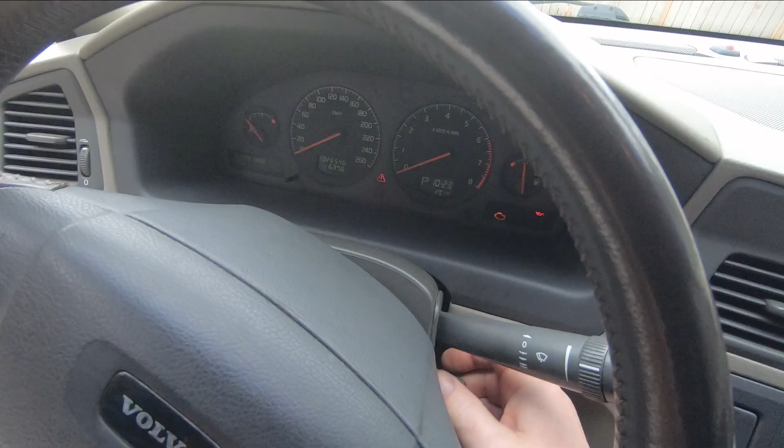See that? Kicks. Hear the fuel pump running. And it doesn't want to go. See that? And it will start eventually, but I don't want to force it, but it'll take quite a few times to get it to go.

Okay, so the other thing you might want to know about is just a little code reader. You can get these anywhere. They're about $20, $25, and you can read whatever code has been set, like when your check engine light comes on the dash of your car. You can plug this into what they call the OBD2 port, the onboard diagnostic port. It's usually down here under the dash, and then just turn your key to the on position, and this will come on, and then you'll get to a point where you can read the code, and it'll tell you what it is, and then you can erase the code.

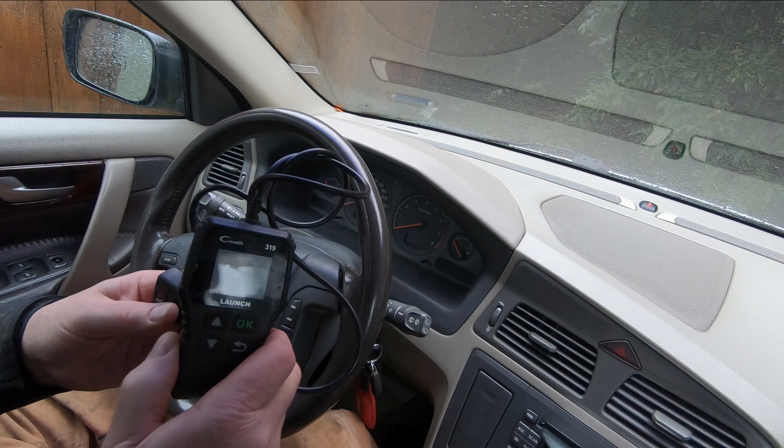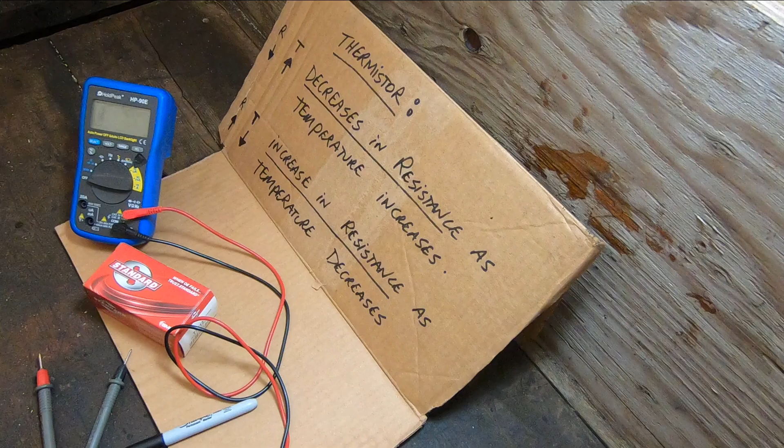Okay, a temperature sender is a thermistor. A thermistor decreases in resistance through it as the temperature increases, and it also does the opposite. It increases in resistance as the temperature decreases. So when the resistance goes down, as the temperature increases, the resistance climbs as the temperature decreases.

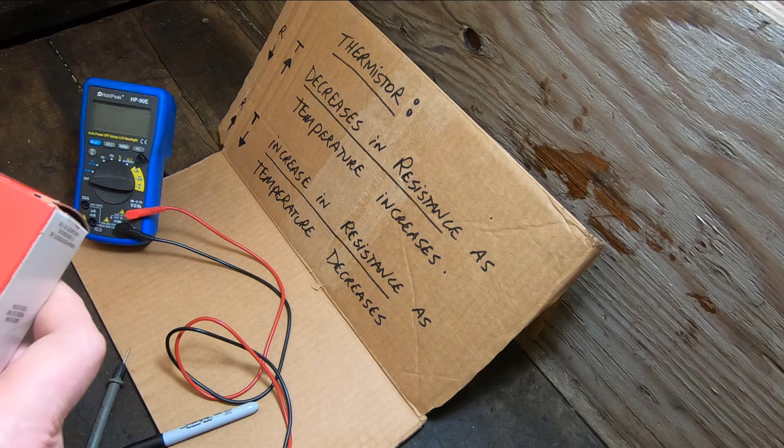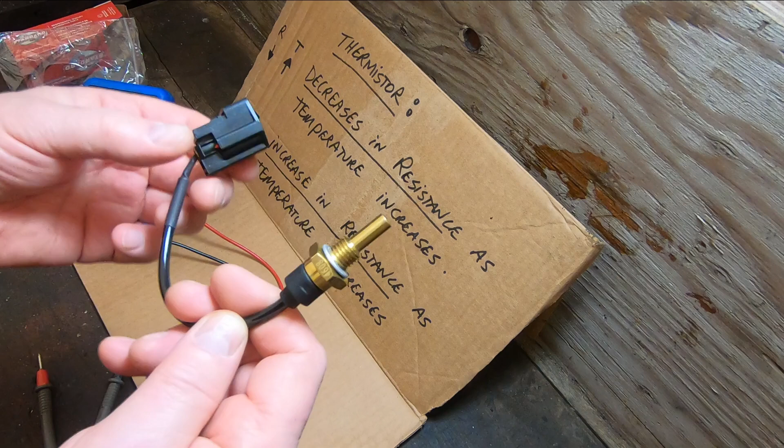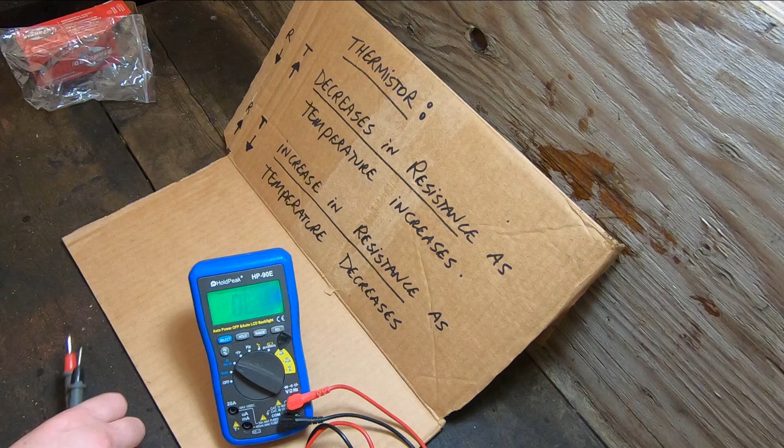And I can show you that here. Here's a new one. Okay, a probe. There's a thermistor inside of here, and it's got two connections out here. So we're just going to go on the resistance setting, the ohm setting on here. And this is just out in the air. So we're going to see if we can get a reading across here.

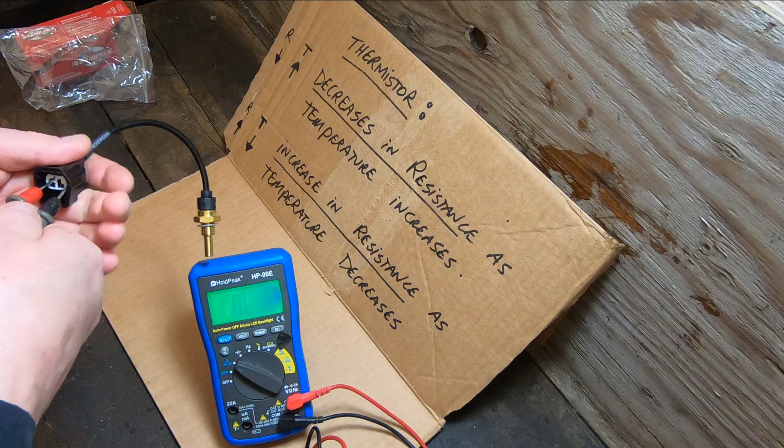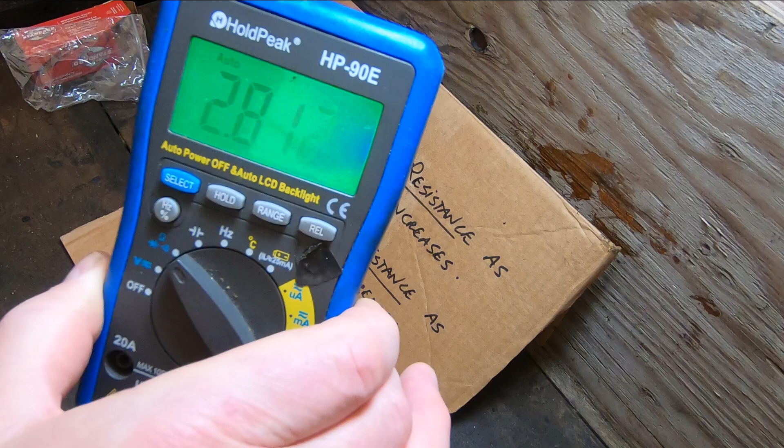Let's see here. Okay, so with this just hanging in free air, we're getting 2.82 thousand ohms. So 2.82 kilo ohms. Okay, 2.83. So it's going to level out there somewhere.

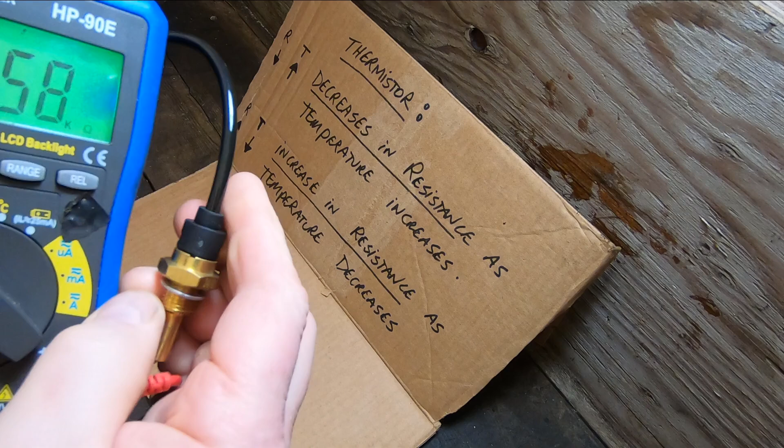All right, now watch what happens when I hold that probe in my hand. Let's warm that up. See it falling? So all I'm doing is I'm warming up that probe, and the resistance is decreasing as the temperature increases. Okay, and that's how they work.

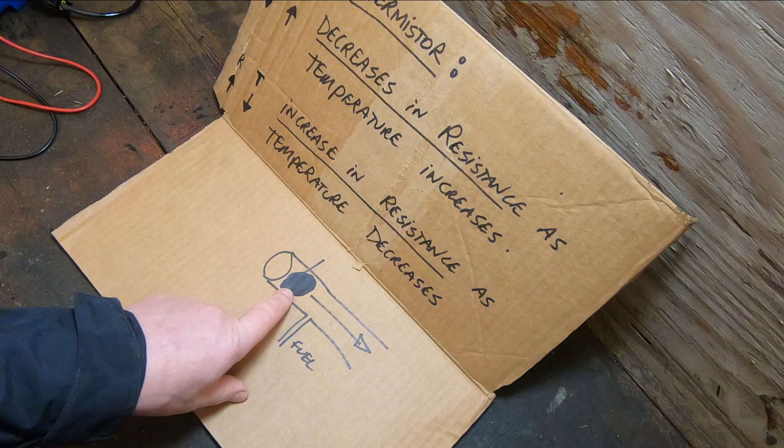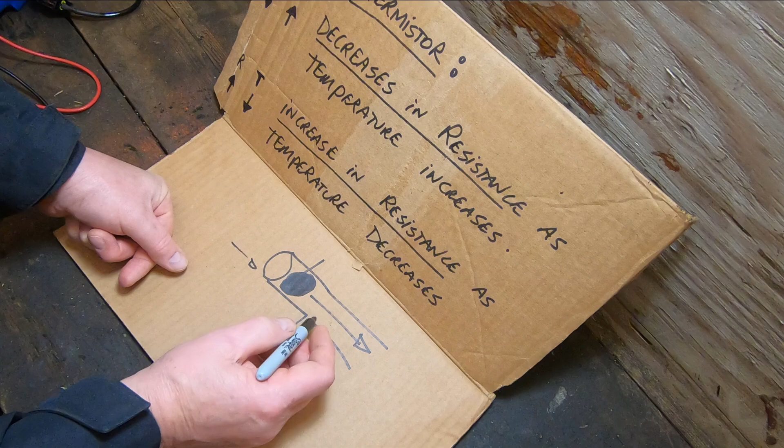Okay, so on a small engine, everyone's familiar with a manual choke. So what we do when the engine's cold, we close the choke, and what it does is it reduces the amount of air that's allowed in here, and that increases the amount of fuel that's going to be introduced to the engine on a cold start. So that helps with the start. With a cold start, you get more fuel and less air. So you get more fuel going into the engine on a cold start when the choke is closed, and once the engine warms up a little bit and you open the choke, then you get less fuel going in. And so the engine runs more efficiently, but you're not really worried about efficiency when you want it started.

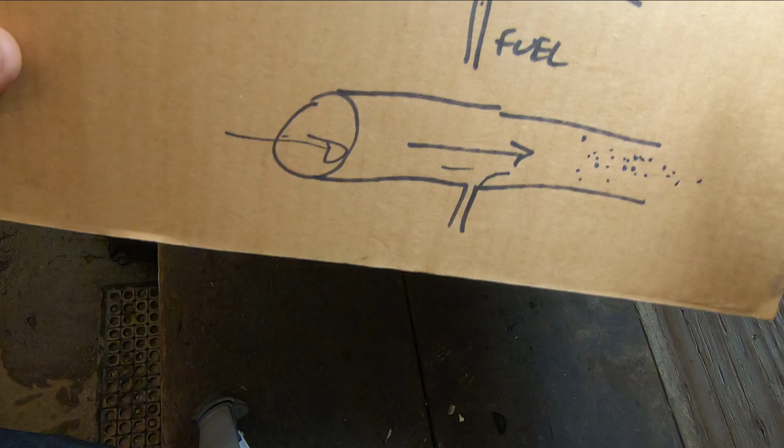You want to start it quickly and you want it to run smooth when it's cold, so you run it quite rich. Basically the electronics on a modern car operate the same as a choke. Even though there's no choke butterfly in the intake stream, it does this another way.

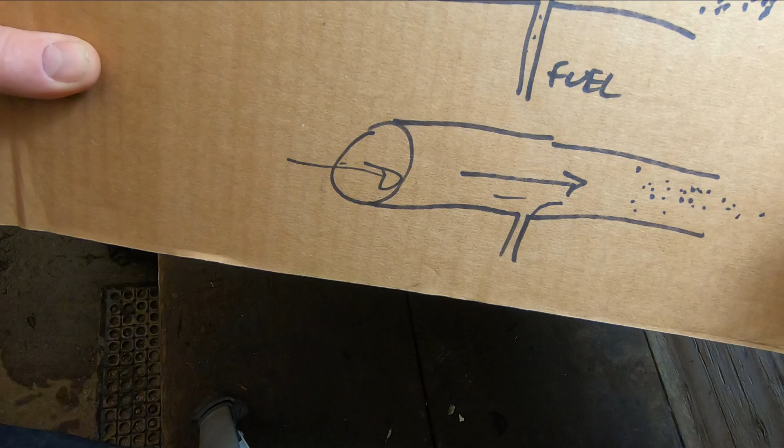It's critical that all the sensors on the engine work in harmony with each other, and if any one of them's out of whack, it'll disturb how the engine runs. It may not even run at all sometimes, but I'll walk you through on this very brief sketch here.

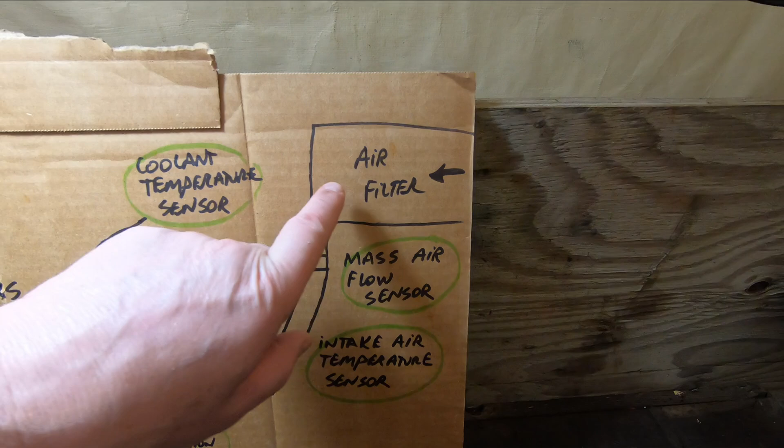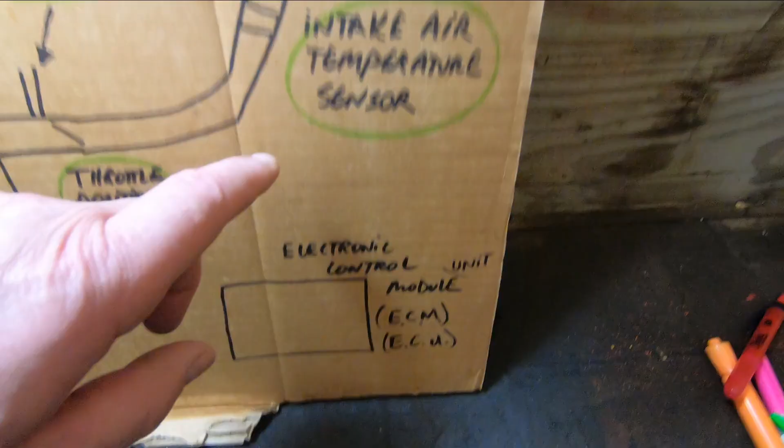Just take a look at this very oversimplified drawing of an engine and the sensors. Let's start at the air intake. You get your air filter, and the air coming in passes through a mass airflow sensor. That lets the electronic control module, or the electronic control unit, the computer, know exactly how much air is coming into the engine through the pipe on the way into the engine.

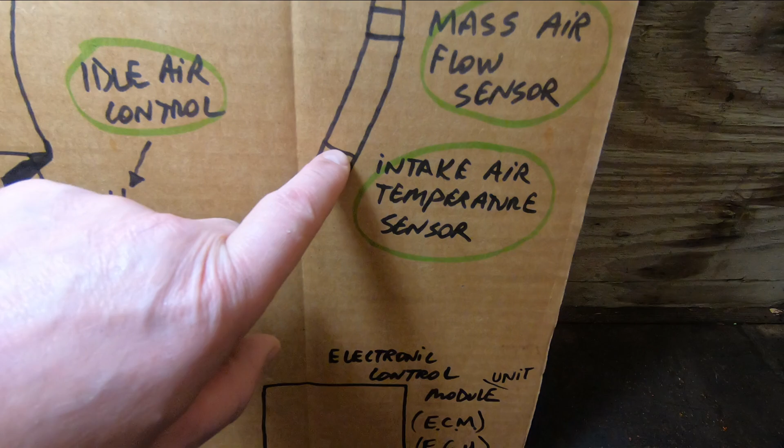There's another sensor called the intake air temperature sensor, and that's self-explanatory. It wants to know what temperature the air is so it can compensate with the amount of fuel that it injects. Over here at the injectors, there's the coolant temperature sensor, what we're looking at today.

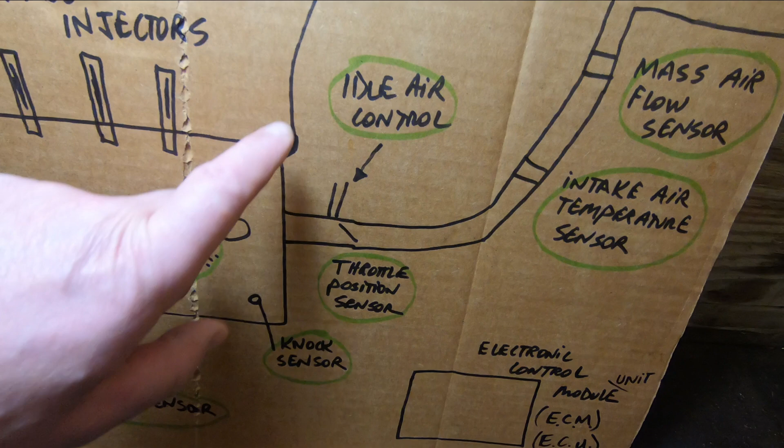You have an idle air control solenoid. It's not really a sensor, but it works in conjunction with the throttle position sensor to allow more or less air into the system, especially at idle.

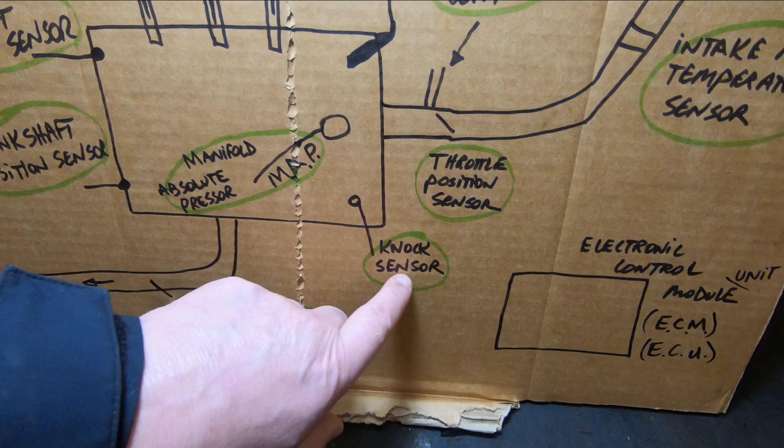Then you have knock sensors. If the engine's knocking and vibrating in a certain way when it's starting to run or when it's running, that could be from pre-detonation of the fuel and things like that. That'll send a signal back to adjust the fuel air mixture and usually light up the trouble light on the dash. You have the manifold absolute pressure sensor that detects either pressure or vacuum in the intake manifold, and that all goes into the computer again to help determine the fuel air mixture.

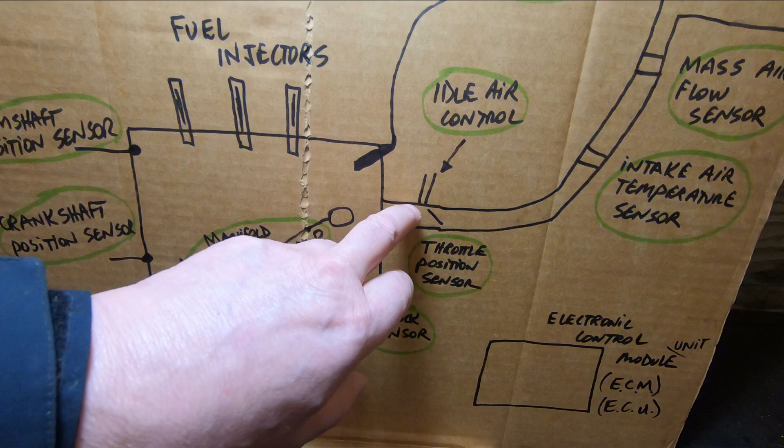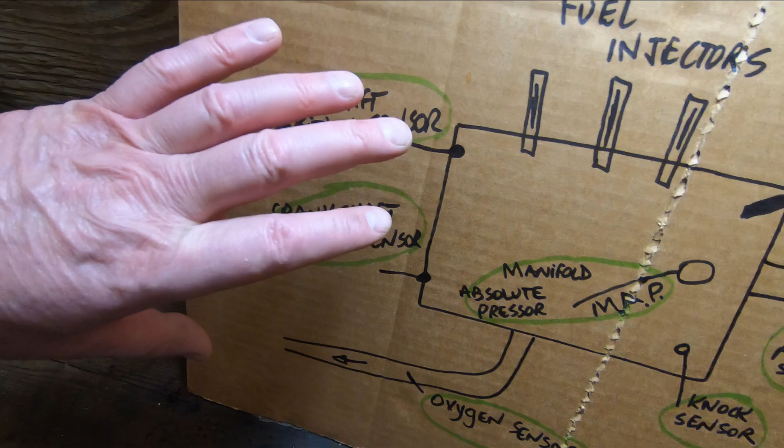You have an oxygen sensor in the outlet pipe. You'll usually have one before and after the catalytic converter, and this lets the computer know how efficiently the fuel combustion is in the engine. You'll also have a camshaft position sensor and a crankshaft position sensor, which let the computer know if the engine's in the right spot for the fuel injection to occur to explode the fuel.

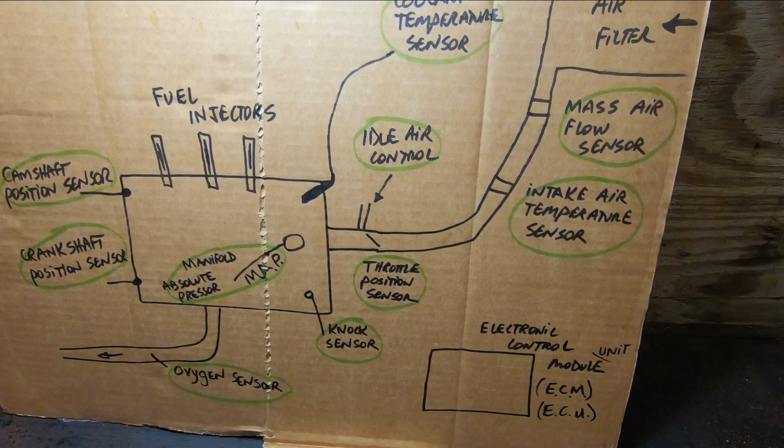That's an overview of the sensors. Now, if any one of those is out of whack, or if it's not reading correctly, it'll send a trouble code, and that's what we've got in this case. We've got a trouble code, and I'll tell you what that is - I'll put that on the screen here in a second. I checked it, and it came up as coolant temperature sensor.

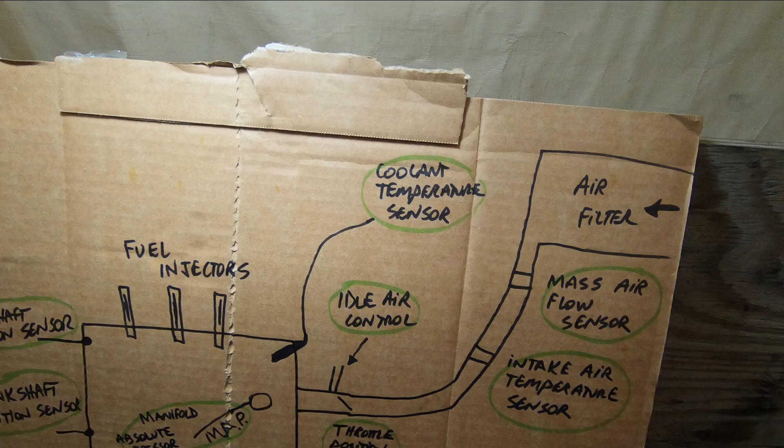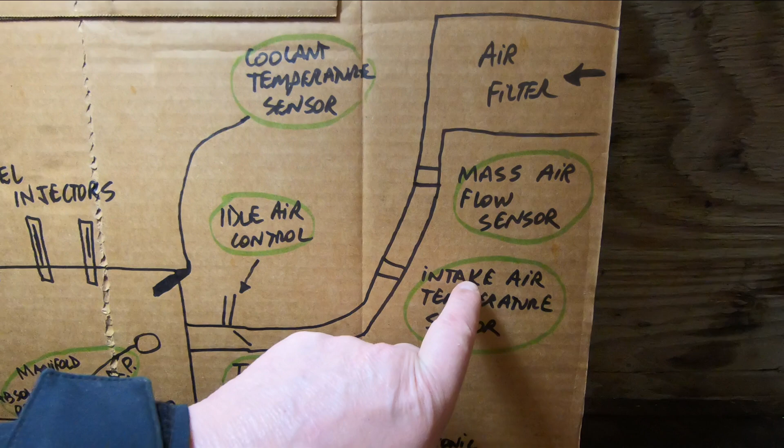Now, most people would say the coolant temperature sensor is just going to be the gauge on the dash, showing that it's either cool, warm, or at operating temperature, and that's all it is, right? But that signal is very similar to the intake air temperature sensor. It tells the computer what temperature the engine block is and the water in it, so that it can adjust the fuel air mixture. So basically we're looking at the same thing again.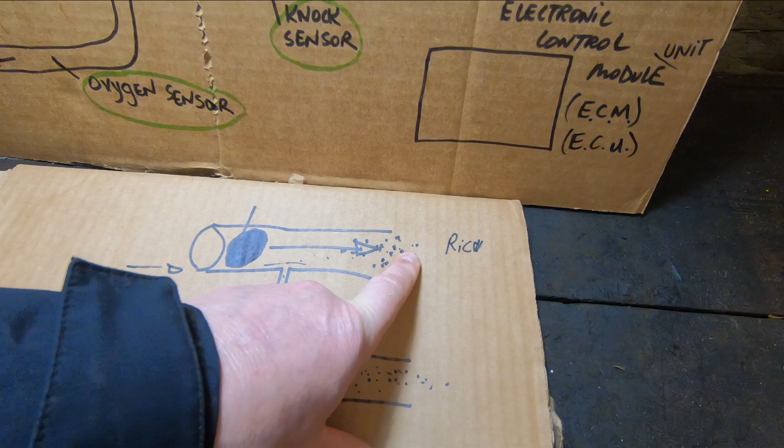In a small engine, for example, when you close the choke, the fuel mixture going in to start a cold engine is rich. But if you don't have the choke turned on, you have a hard time pulling and starting that little engine. That engine was hard to start - you saw when I tried to start it here a minute ago.

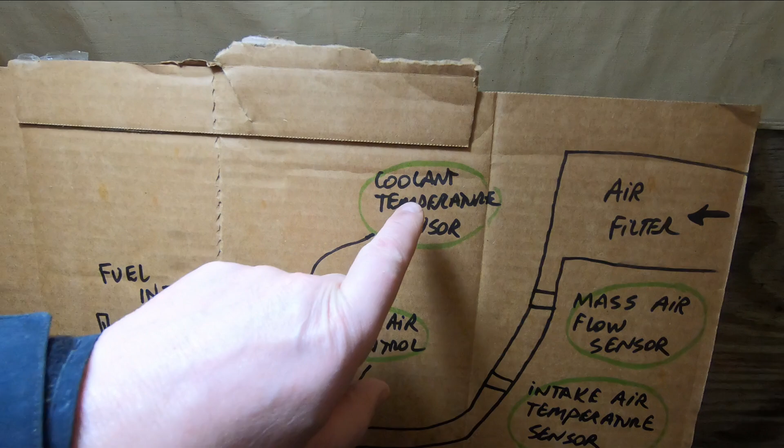The reason is the coolant temperature sensor is faulty, and it is giving a sensor signal to the computer that the engine is probably warm when it's cold. So what's happening is less fuel is going to be injected because it thinks the engine's already warm, instead of what it actually is.

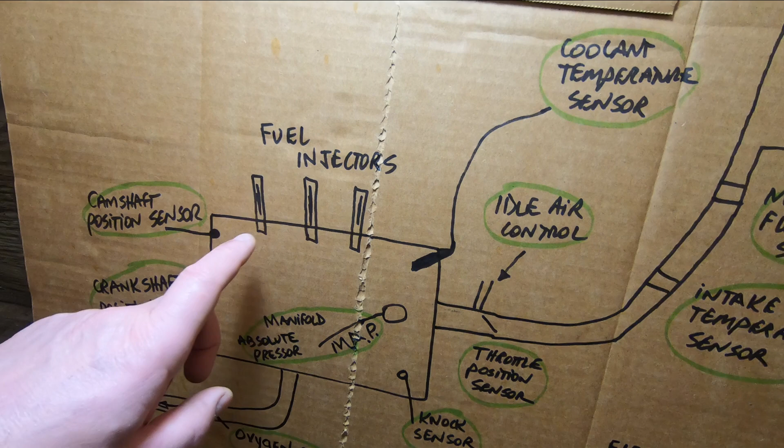It's below zero, and what you should be giving the engine is a lot more fuel on that cold start. If this sensor was reading properly, it would send a signal back to the computer that the engine is ice cold, and we've got to increase the amount of fuel injected on that cold start.

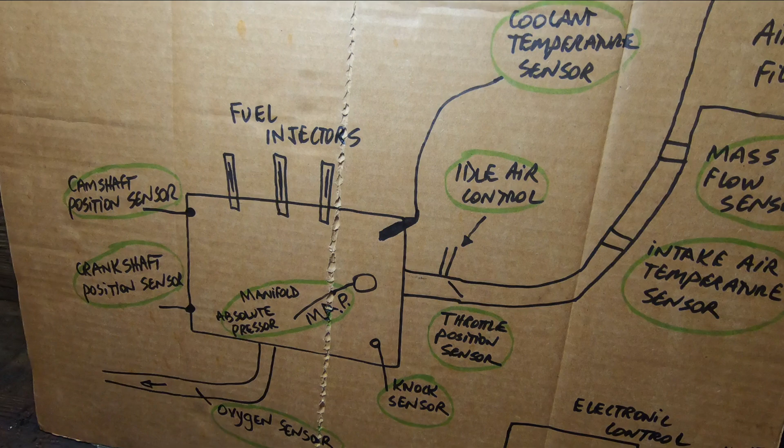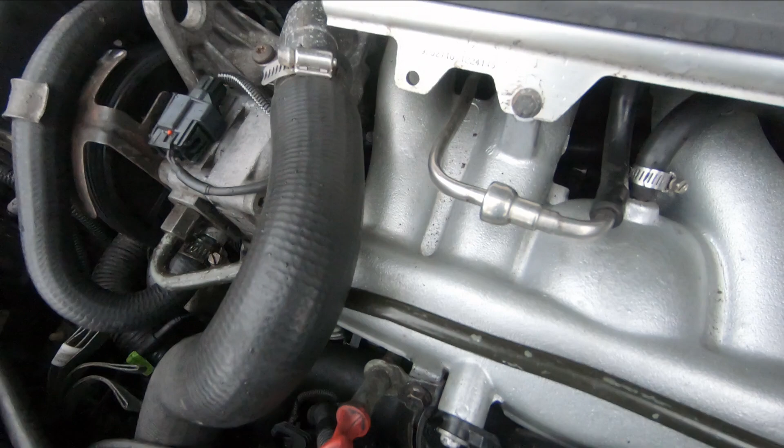Okay, let's get that sensor changed. Just put a pan under here in case there's any spillage. I was hoping to get at that sensor without having to take this hose off, but I'm going to have to take it off. We're pretty high in the engine here, so there might be a little fluid leak out, but if I take this hose off, I'll be able to get at that sensor right there.

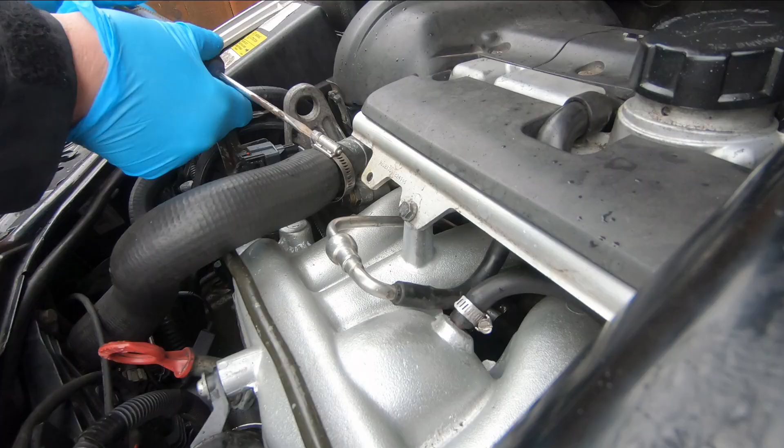Okay, I'm going to hold the hose up too. Like that. There.

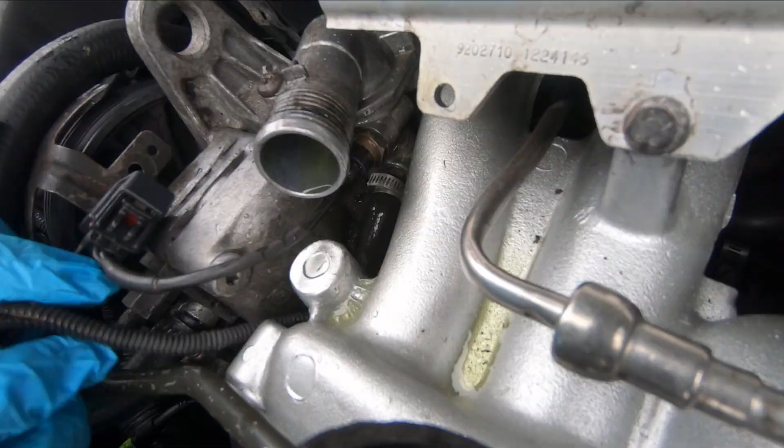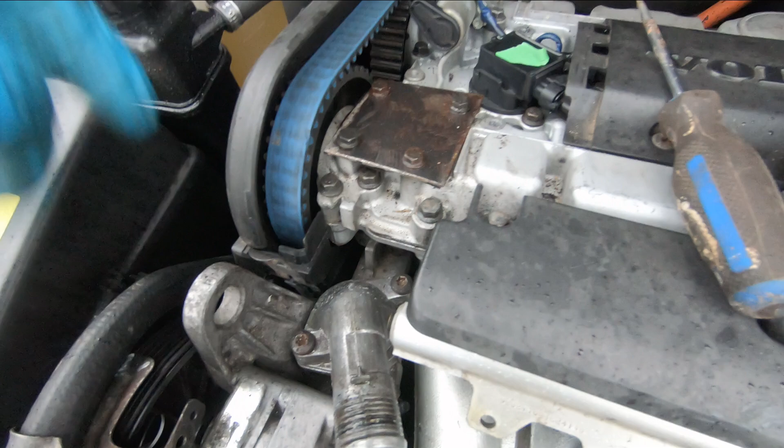So I'm going to have to take this cover off, and I'm going to have to take off the thermostat housing cover right here. Okay, those two bolts out of there, the two clips, and I'm going to lift this cover off. Now we can get at this other bolt in here, and these two bolts here.

Okay, just out of that housing.

Okay, so I've got some pipe dope with PTFE, and I'm going to put a little bit of that on the threads.

Now we've got that one ready to go in, and this one's loose. So out comes this one. Finger over that. And here's the new one. And in it goes. And there it goes.

Okay, all right, that's snug. Off any excess.

So that housing came up with the thermostat, and it's got a rubber gasket, so that's okay. Everything looks good there, so we'll just put that back down and get that tightened down. Snug. Okay, that's good.

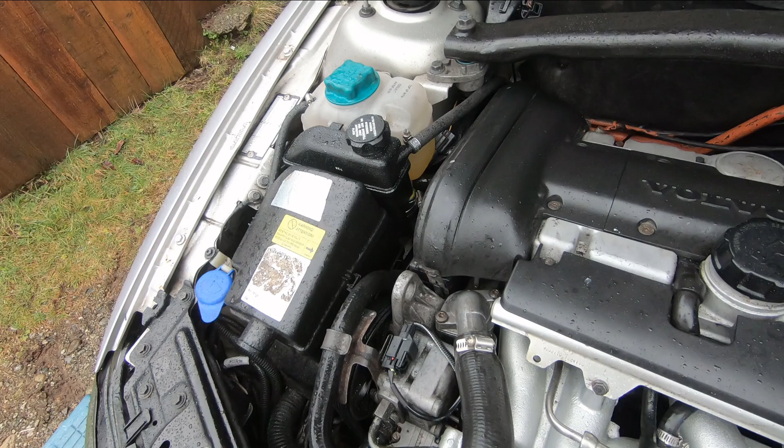Okay, that's all back together. We only lost maybe a half a cup of coolant, and we'll keep an eye on the reservoir after the car's been started and run a while. But next to nothing came out in the pan here.

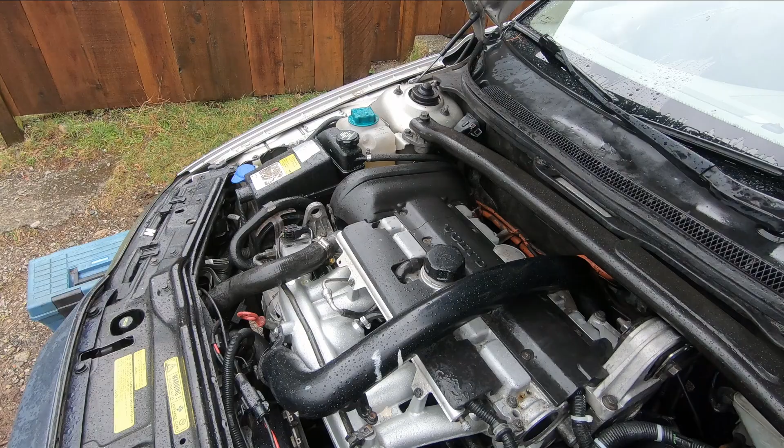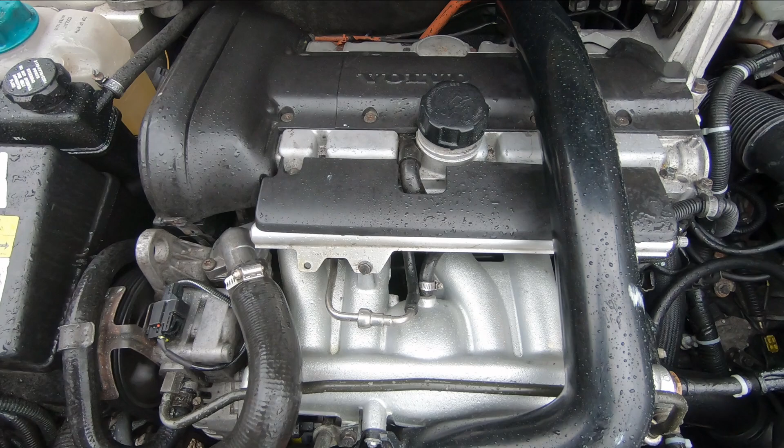Okay, let's go and try and start the car and see if it starts any better. It's just above freezing, so let's see if that made any difference. It started right up, right away, no hesitation, no long starts, just right away, immediately.

So that was our problem. Before we close the video, we're going to go over and test the old sensor and see what its readings were. Okay, so we're back at the bench. There's the old one here, let's test that and see what that comes up as.

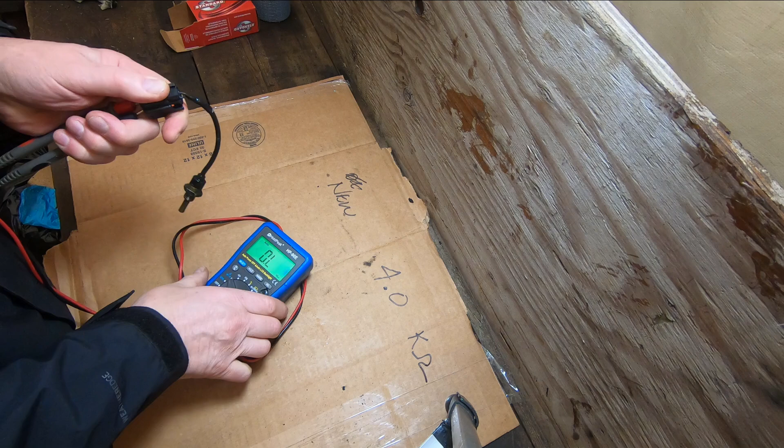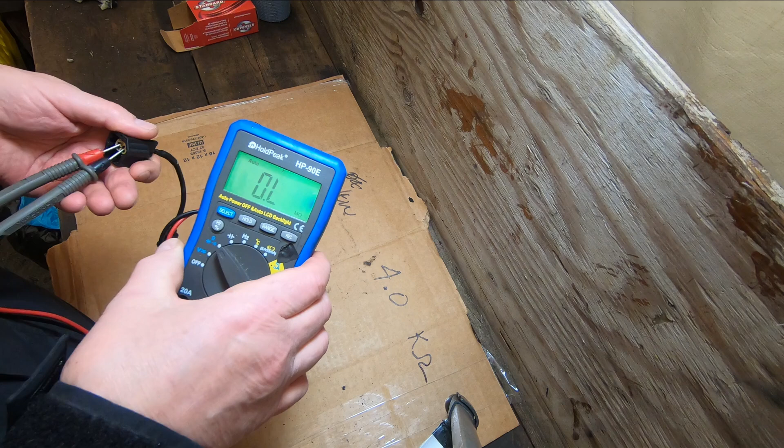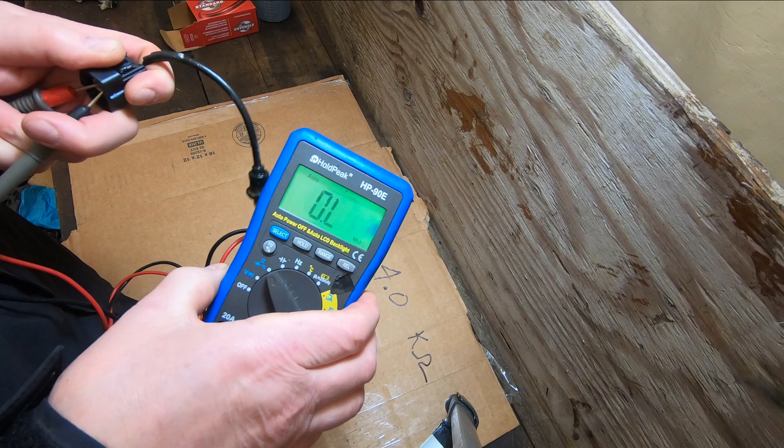All right, let's get the probes in here. Getting nothing so far. Let's see here. There's got to be something happening in there. I'm getting nothing at all. I have OL, open line, so it's showing no continuity through there at all. So there's an open in this somewhere.

That would have resulted in the engine thinking the coolant was warm instead of ice cold, and not putting enough fuel in that initial start to give it a richer start, as if it had a choke on it, right? So anyway, hopefully that helps somebody. That's an unusual problem—you'd think when you have a hard start, it's got to be fuel, it's got to be spark, something like that, but you're not going to think it's the coolant temperature sensor, are you? I didn't anyway, but hopefully that helps somebody.